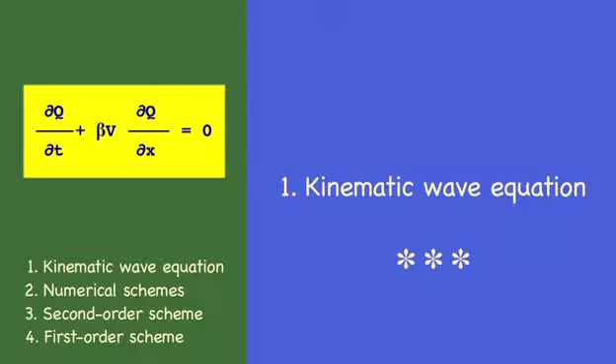Three types of unsteady open channel flow waves are commonly used in engineering hydrology: 1. Kinematic, 2. Diffusion, and 3. Dynamic. Kinematic waves are the simplest type of wave, and dynamic waves are the most complex. Diffusion waves lie somewhere in between kinematic and dynamic waves.

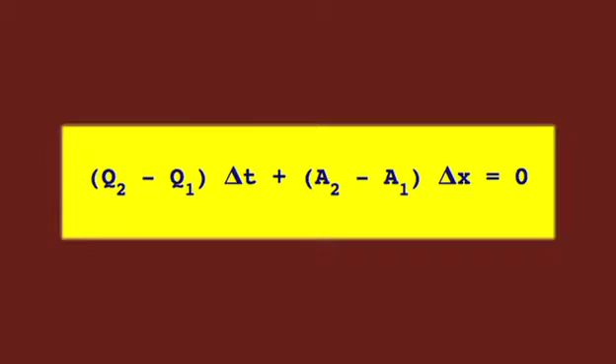The kinematic wave equation is based on the principle of mass conservation within a control volume. This principle states that the difference between outflow and inflow within one time interval is balanced by a corresponding change in volume. In terms of finite differences, in which Q is flow, A is flow area, delta T is the time interval, and delta X is the space interval. In differential form, this equation can be written as follows. This is the equation of conservation of mass, or equation of continuity.

The equation of conservation of momentum contains 1. Local inertia, 2. Convective inertia, 3. Pressure, or flow depth gradient, 4. Friction, 5. Gravity, and 6. Momentum source term.

In the kinematic wave equation, a statement of uniform flow is used in lieu of the conservation of momentum. Uniform flow is strictly a balance of gravity and friction. Therefore, the rest of the terms, including pressure gradient, inertia, and momentum source, are excluded from the formulation. In other words, a kinematic wave is a simplified wave that does not include these terms or processes. This simplification imposes certain limits on the applicability of the kinematic wave.

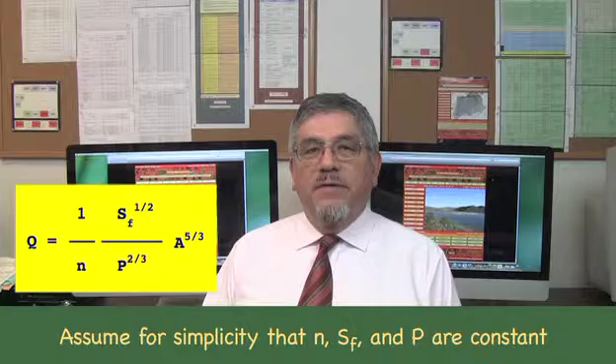Substituting the hydraulic radius into the Manning equation leads to, assume for simplicity that N, S sub F, and P are constant. This is the case of a hydraulically wide channel where the wetted perimeter may be assumed to be independent of flow area. Assuming a rating equation of the following type, it follows that alpha is and beta is

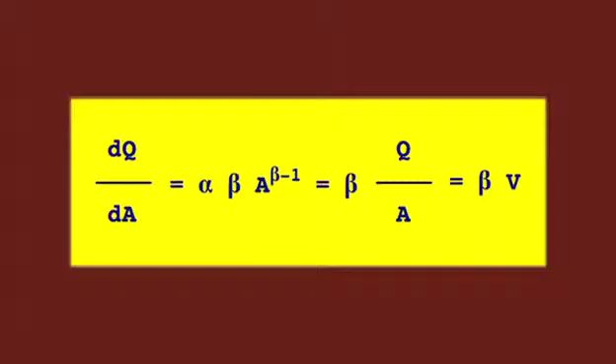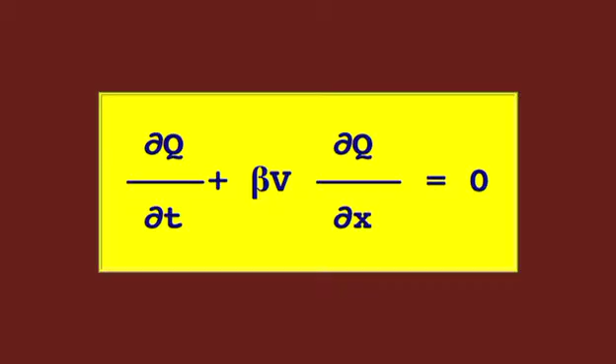Differentiating the rating equation with respect to flow area leads to the wave celerity, in which V is the mean flow velocity. Multiplying the continuity equation with the wave celerity and applying the chain rule of differentiation leads to the kinematic wave equation. Or, alternatively, these equations describe the movement of waves that are kinematic in nature. These are referred to as kinematic waves, that is, waves for which inertia and the flow depth gradient have been neglected.

The kinematic wave equation is a first-order partial differential equation. Therefore, kinematic waves travel with celerity dQ/dA and do not attenuate. Wave attenuation, that is, wave diffusion, can be described only by a second-order partial differential equation. The kinematic wave equation is a nonlinear partial differential equation describing the change of discharge in time and space. It is nonlinear because the wave celerity varies with discharge. However, the nonlinearity is usually small, and therefore the kinematic wave equation can be solved in a linear mode by considering the wave celerity to be constant. The solution of the kinematic wave can be accomplished by analytical or numerical means. The simplest kinematic wave solution is a linear numerical solution.

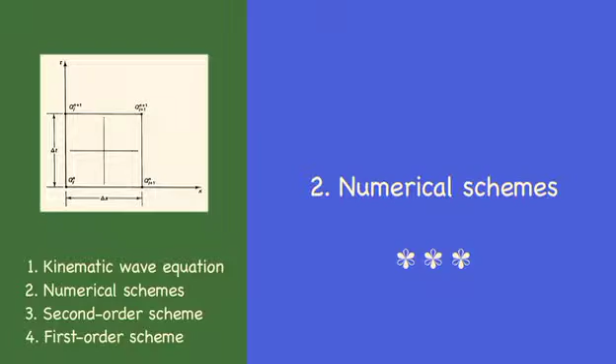Numerical schemes are discrete formulations on the xt plane of the governing differential equations. The order of accuracy of a numerical scheme measures the ability of the scheme to reproduce the terms of the differential equation. In general, the higher the order of accuracy of the scheme, the better it is able to reproduce the terms of the differential equation. Forward and backward finite differences have first-order accuracy, that is, discretization errors of first order. Central differences have second-order accuracy, with discretization errors of second order.

The numerical solution of the kinematic wave equation with first-order schemes creates numerical diffusion and dispersion, while second-order schemes create only numerical dispersion. Numerical diffusion is caused by first-order discretization errors, numerical dispersion by second-order errors. A third-order scheme of the kinematic wave equation provides the exact solution, creating neither numerical diffusion nor dispersion. Numerical diffusion and/or dispersion are caused by the finite size of the grid and are not necessarily related to the physical problem.

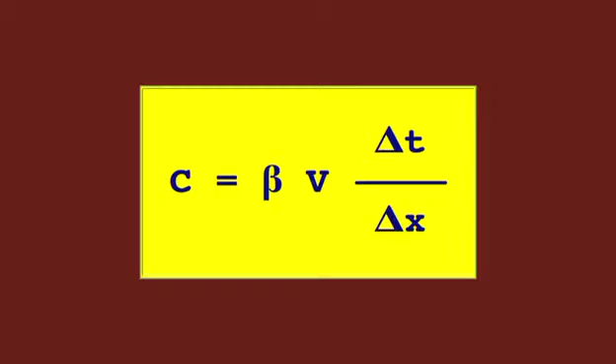The discretization of the kinematic wave equation with a linear second-order accurate scheme using central differences in time and space leads to the following routing equation, in which the routing coefficients are and C is the Courant number, defined as follows. Note that the Courant number is the ratio of physical wave celerity, beta V, to grid celerity, delta X over delta T. The Courant number is a fundamental concept in the numerical solution of hyperbolic partial differential equations such as the kinematic wave equation.

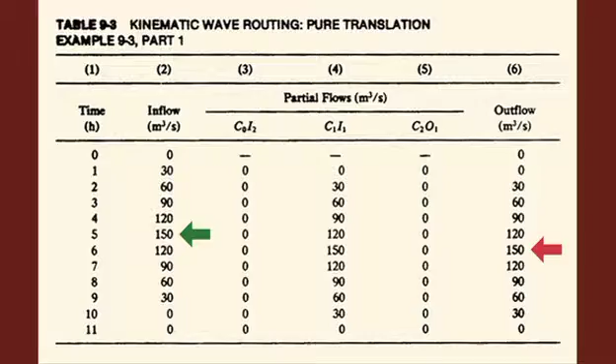This table shows the kinematic wave routing of an inflow hydrograph with wave celerity and space and time intervals such that the Courant number is equal to 1. The table shows the exact translation of the hydrograph, reproducing the exact solution of the kinematic wave. This other table shows the kinematic wave routing of an inflow hydrograph with wave celerity and space and time intervals such that the Courant number is 1.5.

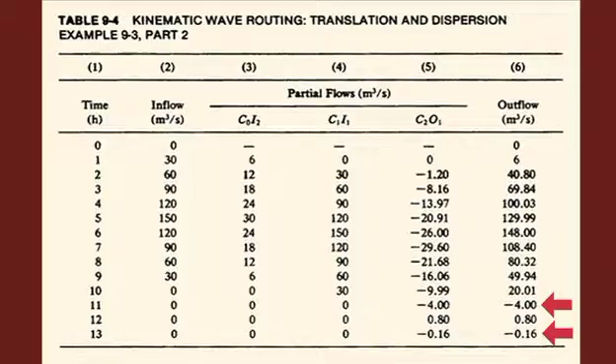In this case, the outflow hydrograph is diffused to a peak of 148 cubic meters per second, as compared to an inflow of 150 cubic meters per second. Also, the outflow hydrograph is dispersed with unrealistic negative outflows present at the tail of the hydrograph. We conclude that the second-order accurate numerical solution of the linear kinematic wave equation is impractical because it only works well for the trivial case of Courant number equal 1.

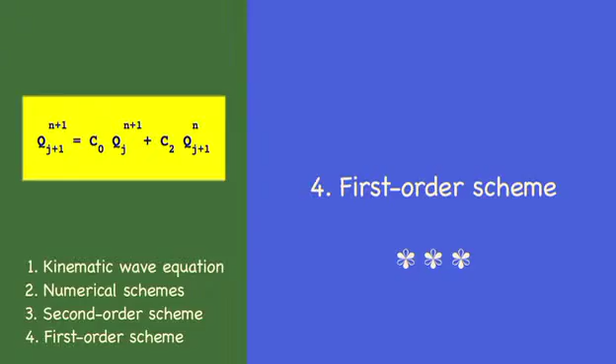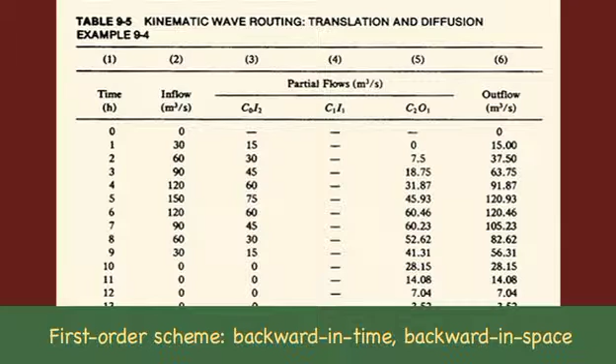The discretization of the kinematic wave equation with a linear first-order accurate scheme using backward differences in both time and space leads to the following routing equation, in which the routing coefficients are. This table shows the kinematic wave routing of an inflow hydrograph with wave celerity and space and time intervals such that the Courant number is equal to 1.

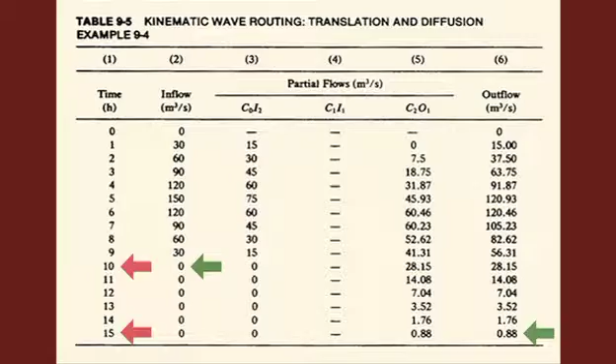The table shows that in this case, the outflow hydrograph for C equal 1 is translated and diffused with the peak outflow at 120.93 cubic meters per second as compared to a peak inflow of 150 cubic meters per second. Additionally, the time base has increased from 10 hours to more than 15 hours. The conclusion is that different schemes for solving the kinematic wave equation lead to different answers depending on the amount of numerical diffusion and dispersion.